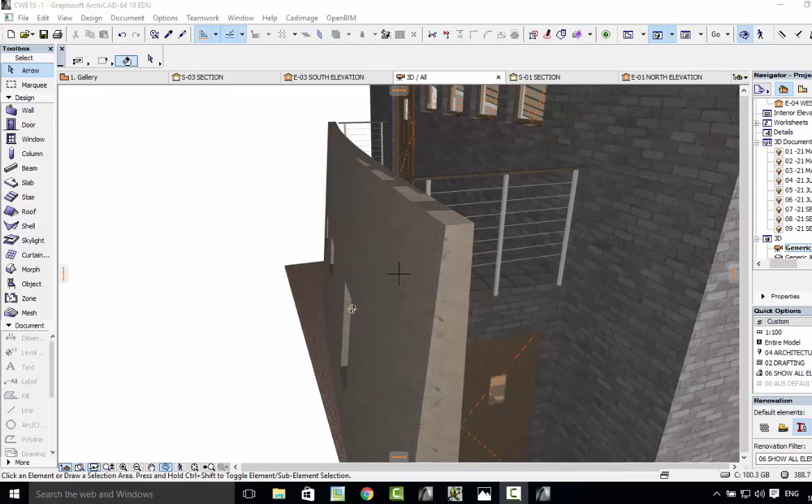Okay, we need to place some handrails at the gallery slab on the inside. I just want to have a look at this first. I've dropped that wall down again, so it's just below those handrails. I think it looks better like that.

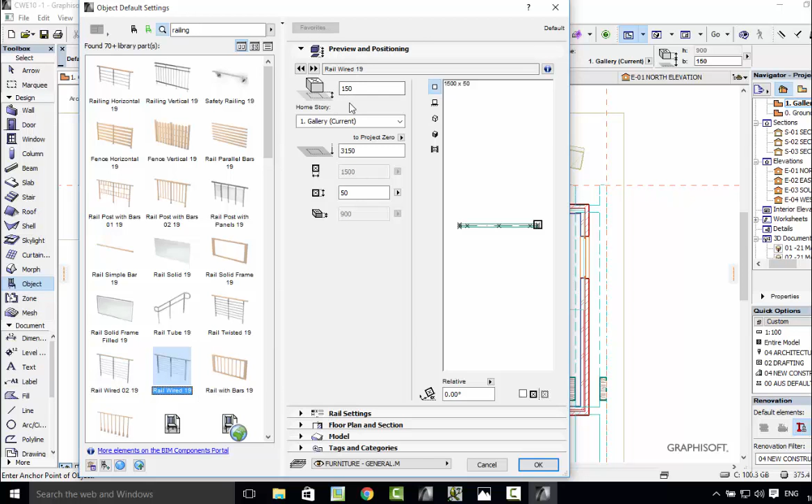Let's go into the 2D and into object. We're going to put handrails on the front of the slab here on the gallery level and around the staircase. Go in, type in railing, enter rail wired just to keep it uniform, and we have the settings which are pretty much the same. The only thing we'll need to do is go in and change how many posts we have. Number of posts here is 3.

Let's make the height 950, and 200, and we'll keep it 1500. 3 posts are 500 millimeters apart.

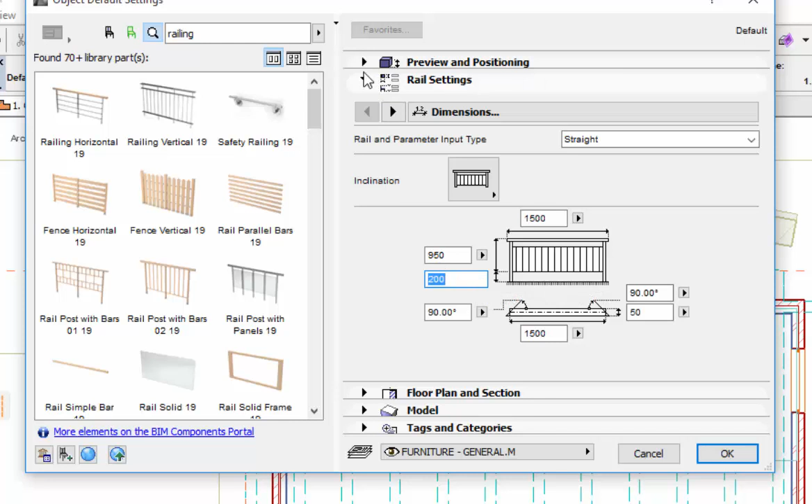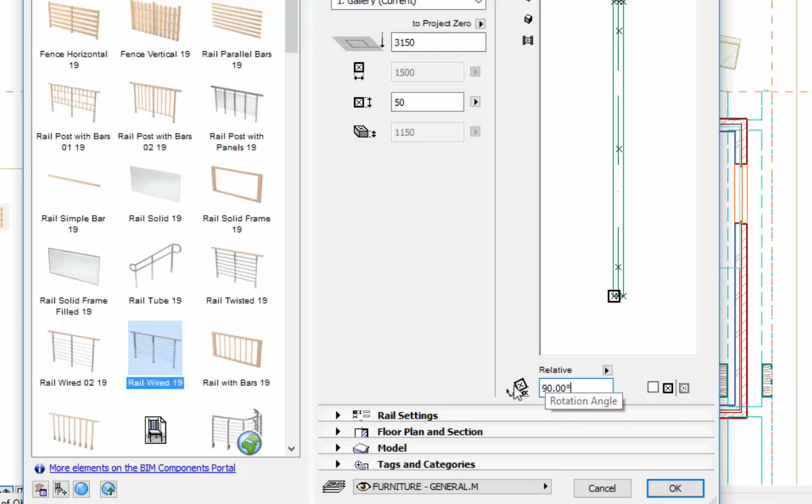That being done, let's have a look at the previous settings. We're on gallery level, 150. The rail we're going to put in around the stairs is going to be 90, so go 90 degrees. And we need to select the bottom left hand. That'll make sense in a minute. So we're going to have to continually come back into the settings tab and change our insertion point and our angle of our railing as we go.

Press OK. Let's zoom in. Now remember, we selected bottom left, so come into the bottom left corner, just click, and our railing's in.

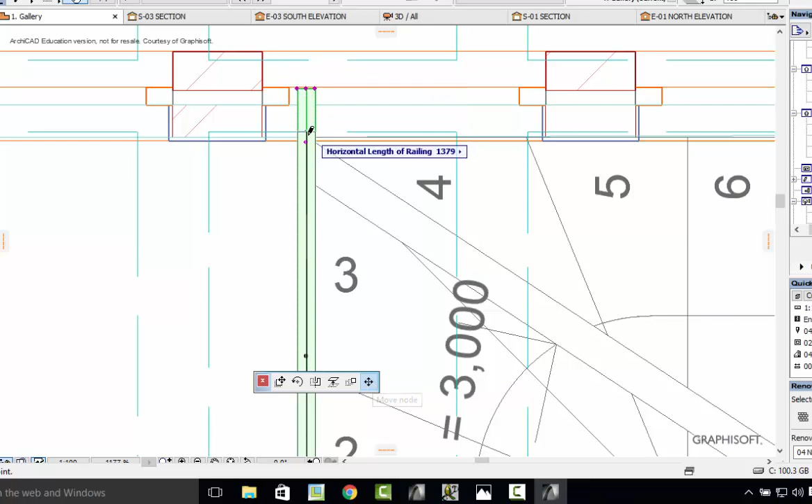Now we need to adjust that, so get out of the railing settings, center node, pet palette, stretch node, move node down to the wall. Right there, and there's our first hand railing in 3D. There's our hand railing in position.

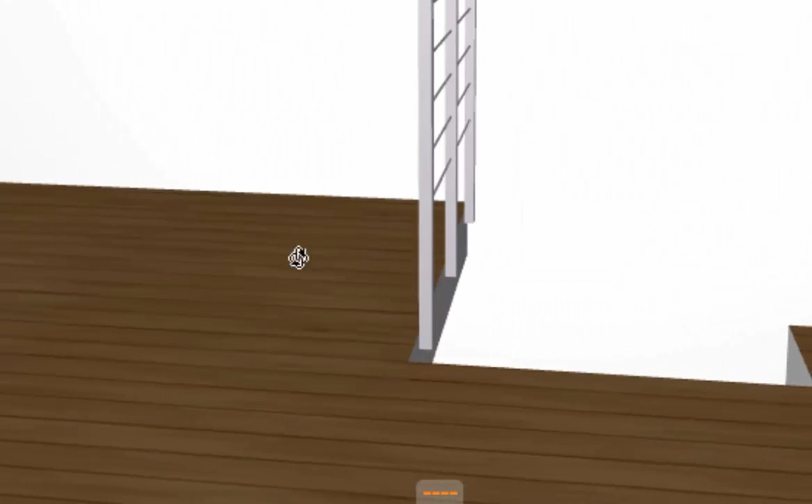Now notice that this bottom rung of the handrail looks a bit high to me. So have a look, I think it needs to go down. We've got 200 millimeters here. So let's go and drop the bottom of this handrail down.

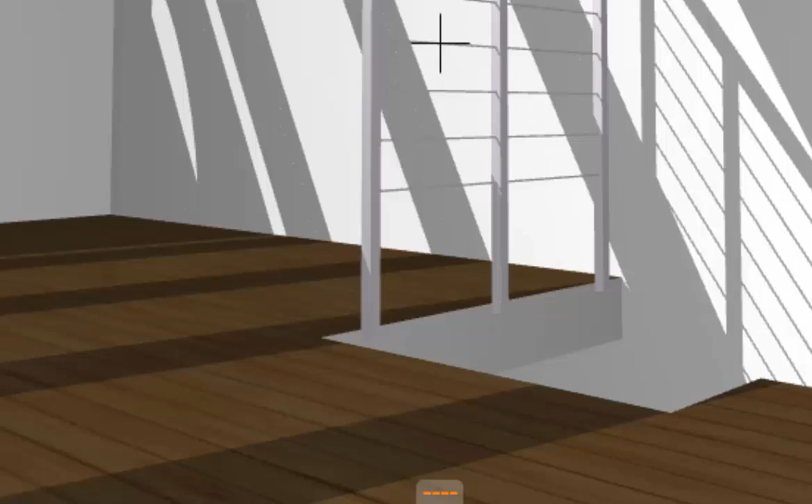So we need to select it. Go into settings, and from home story, let's try 50, enter. And let's drop down. That looks a lot better.

We could go a bit further. So, because the slab is 205, let's go down. Let's leave it maybe 30. Back into settings, let's go 30 there. That's the base of that rail. Press OK. That looks a lot better.

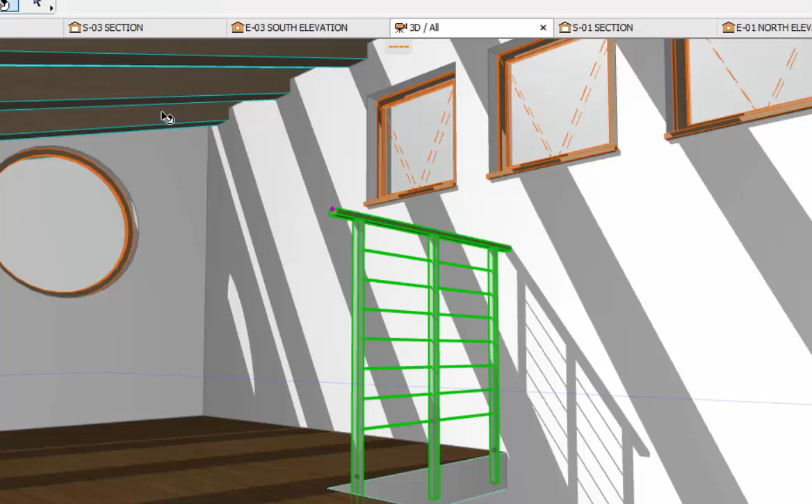So that's 30, and let's put our next one. Escape to get out of that function. Back into 2D, and we'll set up the next railing. Press object. Make sure you press escape so it's not selected. We don't want to change this one.

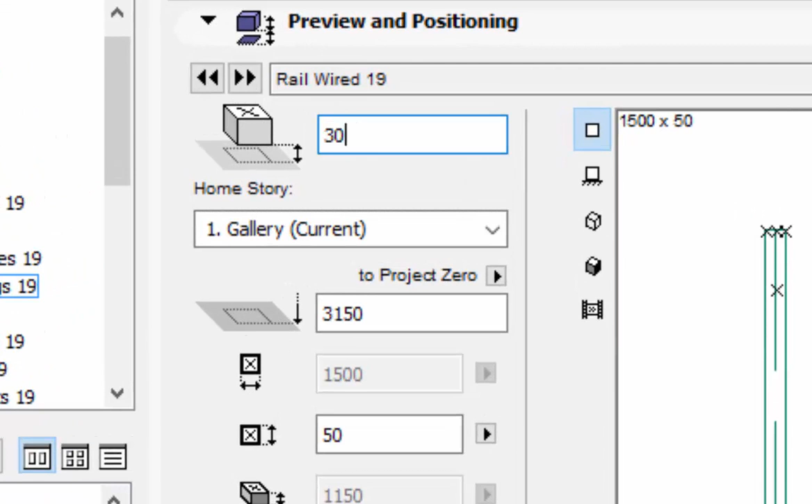We want to change our next one. So make sure we go 30 here. And our insertion point on this one, we need to change it around to 0. Enter. Change it around to 0, and our insertion point will be just here. Make sure it's bottom right. Press OK.

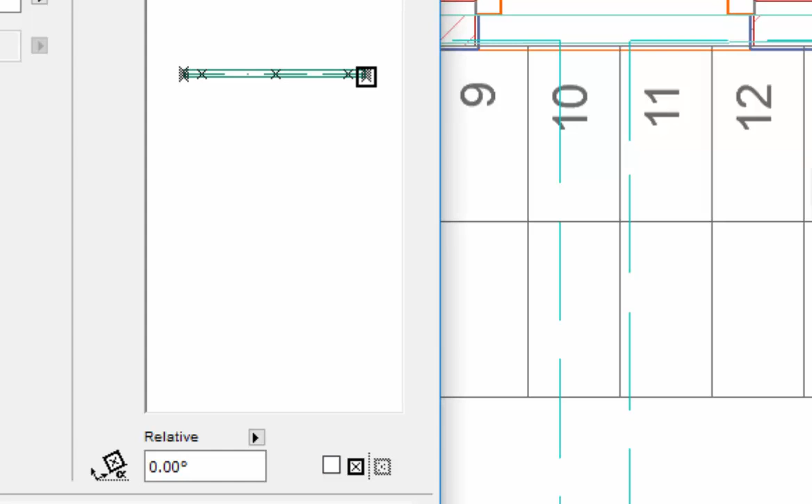Check rail settings are the same. Yep, okay. And bottom right, just there. Okay.

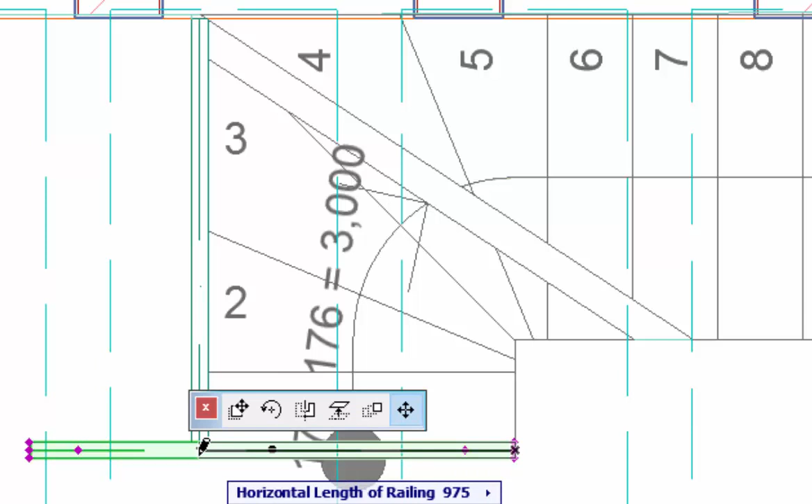What we'll need to do is stretch these. Make sure you've got the sensor node. Stretch them back till it comes. Let's just go halfway, and we'll see how that looks. Let's go in 3D.

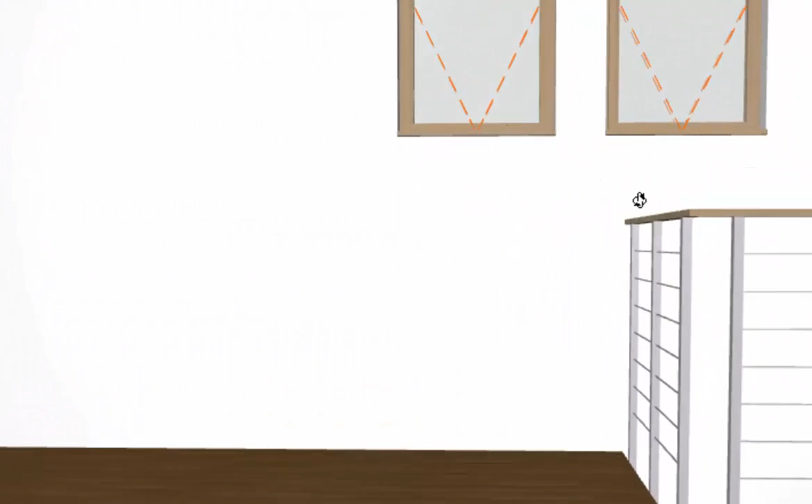That looks okay, we've got a miter joint. Now the only thing we'll need to do is adjust these posts here, and we can do that later. So let's put all the handrails in, and then we'll adjust them. So go back to 2D.

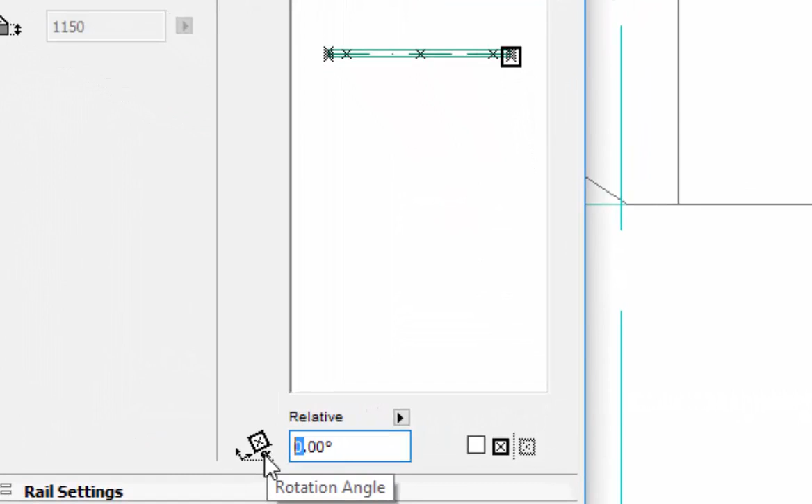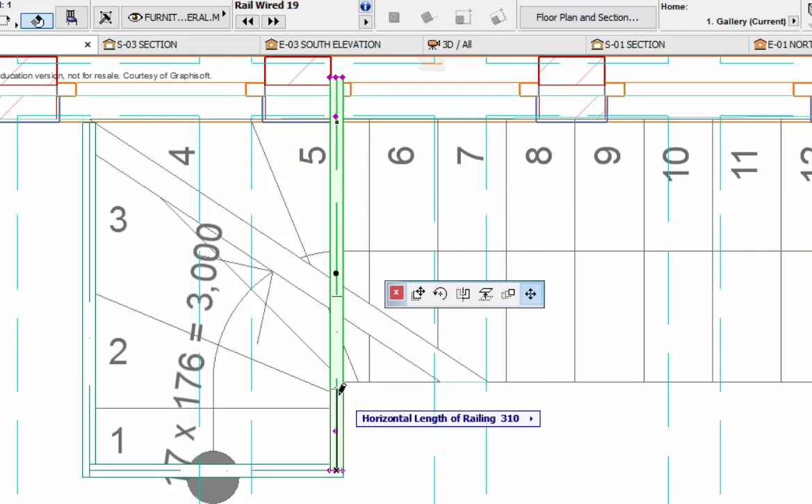Now we need to go 90 again for the small bit here. And we need bottom right. Okay, let's come in here, halfway along the rail, bottom right. Obviously we need to move this right in, just move it right back in until we get the other rail in. What we're going to do with this one is place it in and then stretch it along.

So hit escape to get out of that function. Object, and let's go 0, and let's select bottom right.

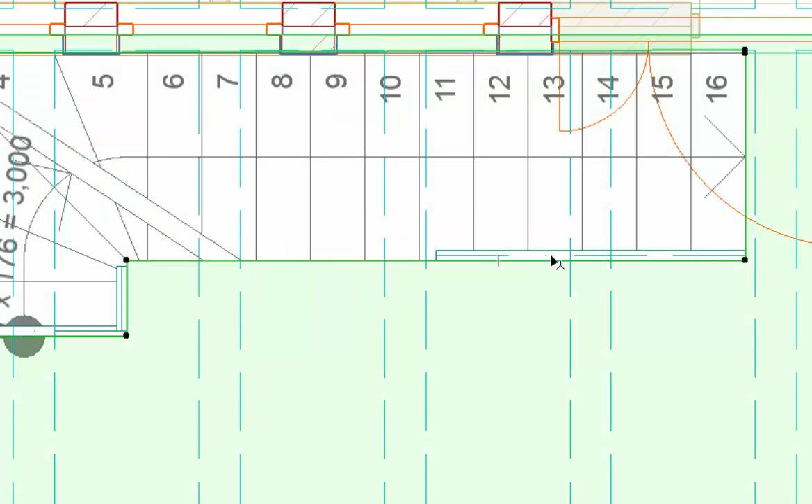Okay, place it in there. We need to stretch it along and then we can customize the posts. Remember, if you can't select it, hit the tab button. Come in, select the center node, pet palette, drag node, and come halfway there, and then bring this one halfway to there.

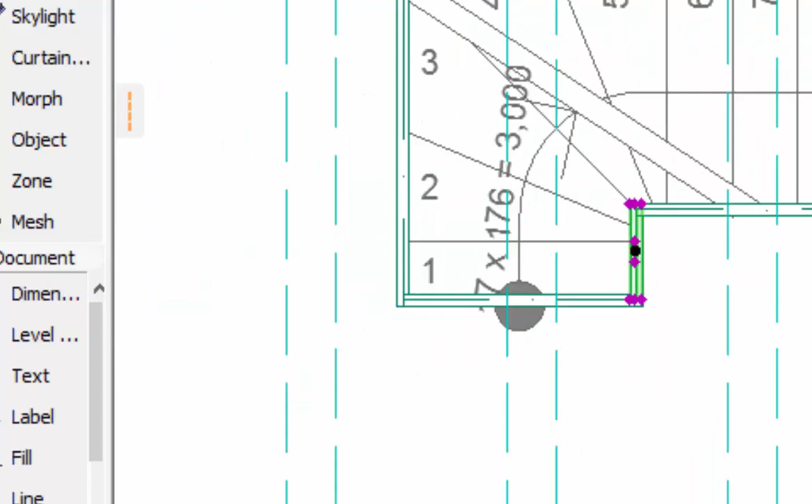Okay, that looks good. Now let's go to 3D. Okay, let's have a look. Obviously we need to adjust the posts, so how many posts we have in, so they look pretty much the same. So let's do that now.

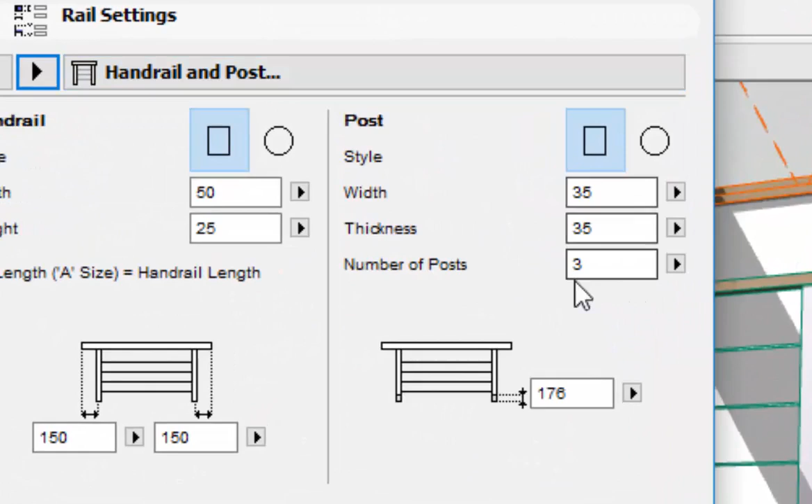Select this one, and we're going to get rid of the center post. Let's go into settings, and under rail settings, by handrail and post 3, let's go 2, enter. That one looks good. Now this one.

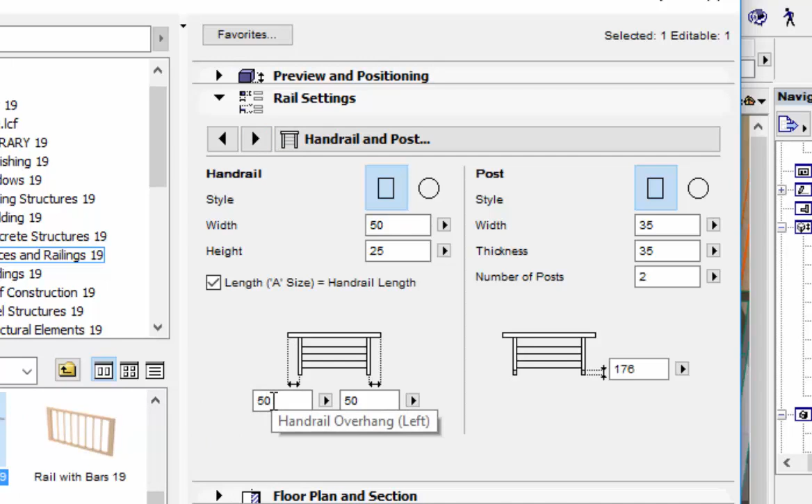Okay, I'm going to select this small rail here and do a bit of customization on it. Go into settings. Now we have here the distance that the post is away from the end of the timber rail, and in the others it's 150. I'm going to change these to 50 and 50 and press OK.

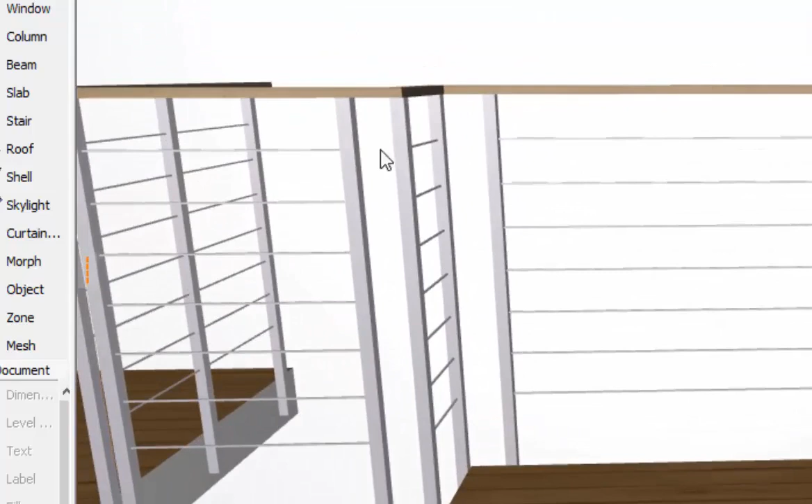Now when we look, I'll just escape. When we look at that, that looks more pleasing design wise than trying to make it 150. So what I think we might do is change all of the railings so they're all the same, and the railings will be 50 millimeters from the end. So let's do that. And this is all part of designing and customizing and being able to change things to the way that you like them.

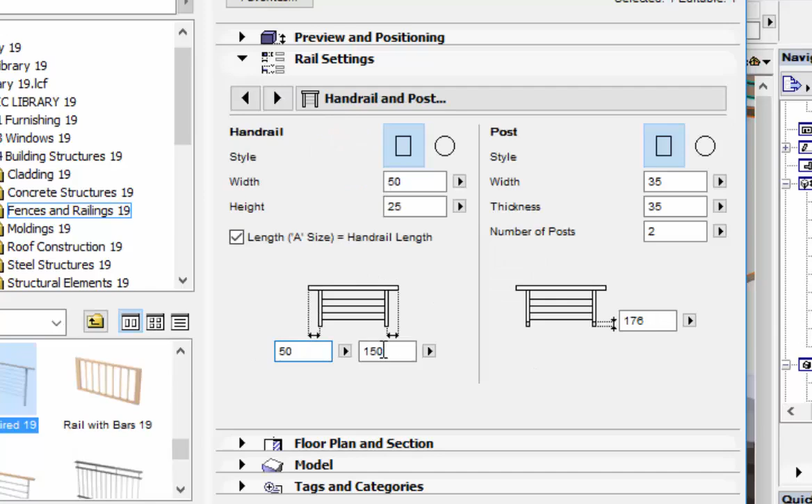So let's select this one, go into the settings, into handrail, and let's change that to 50. Change this one to 50. We'll just see what that looks like. Yeah, I think that looks much better.

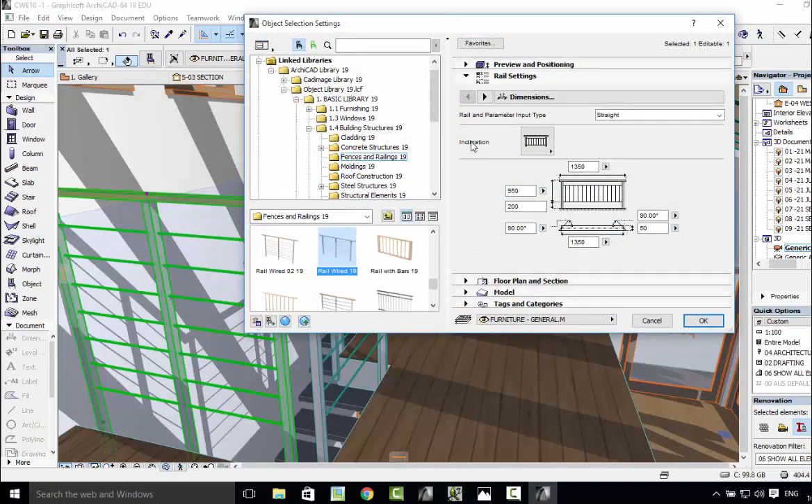Let's have a look on the outside here. Yeah, they're butting up to each other on the corner. Select that handrail, go into the settings, and again to handrail and go 50. Well, at that end, yeah, let's keep it 50. So it's uniform and 50 here.

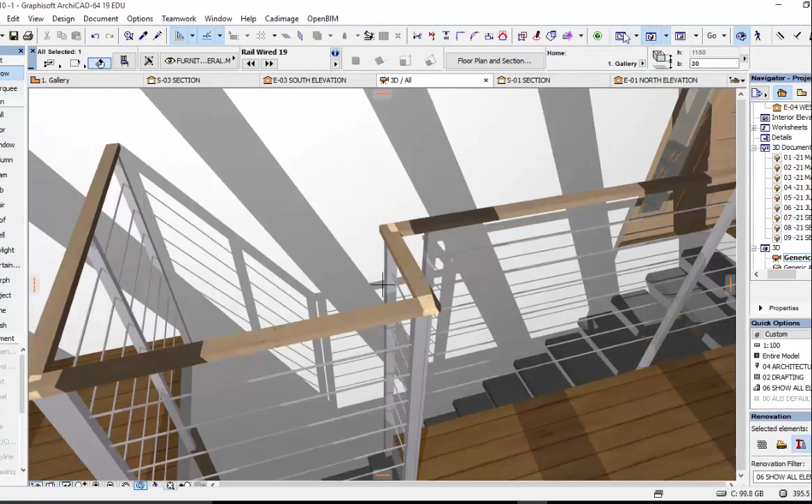Okay, and then moved out. Let's go into 2D and change this. Let's zoom in and let's go back to halfway there. And let's take this one back to halfway there. No, let's take this one right through to there.

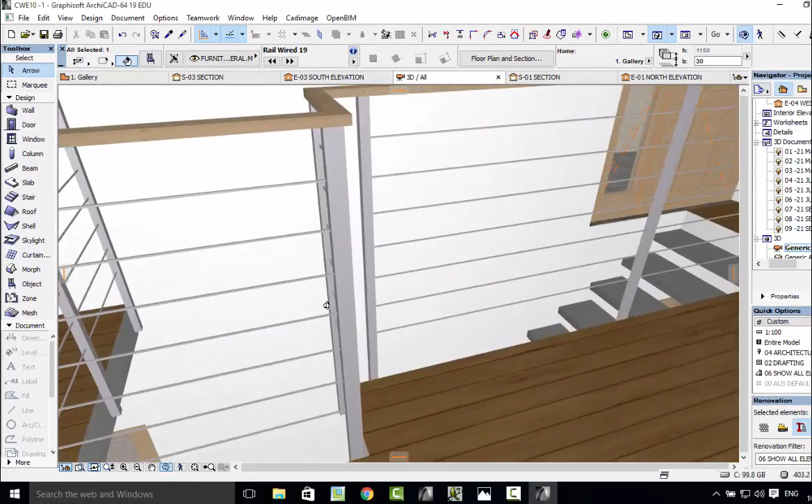Well, let's have a look. 3D looks better. It's matching the other side. Let's make sure they're matching. So see how this handrail, it goes to the center of the long one.

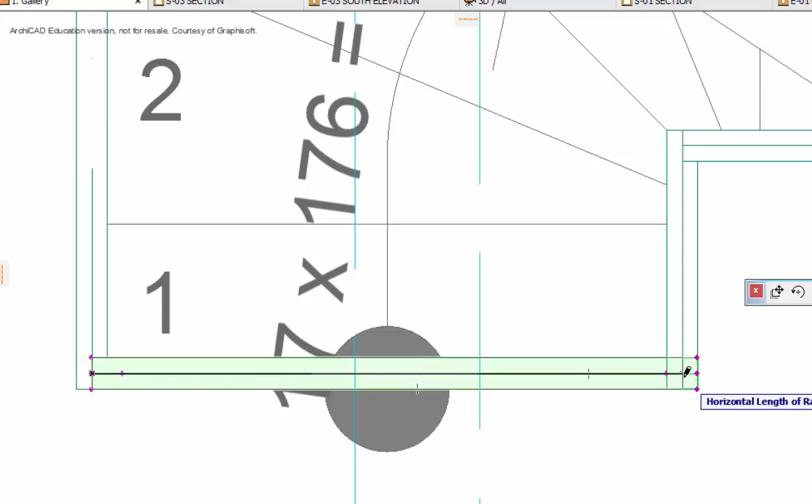Let's do the same. So let's bring this one right through to there. And when we select this handrail, let's bring that back halfway. And now it should match. Now those posts match, so let's do that all the way through. Back to 2D. That's correct.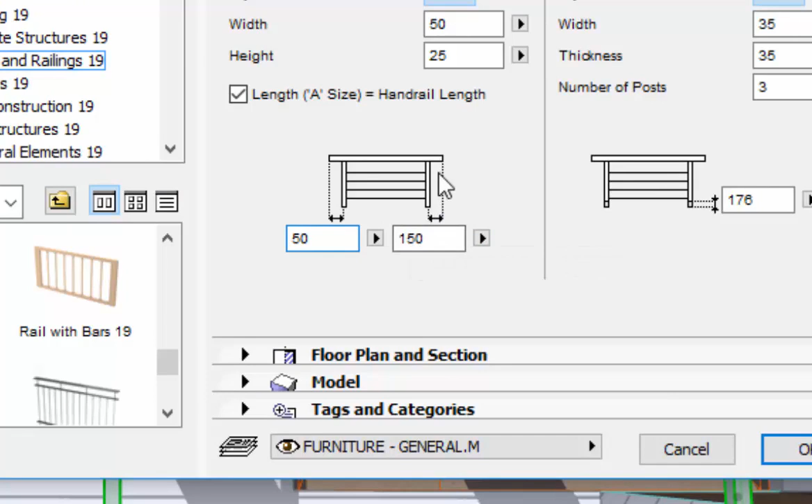And all we have to do is change now the number of posts in this railing here. Now on this last handrail, we'll leave this end at 50 and we'll leave the start end at 150 so someone can grab hold of the railing. There we are there. So that's 50, 150, and we're going to change the posts.

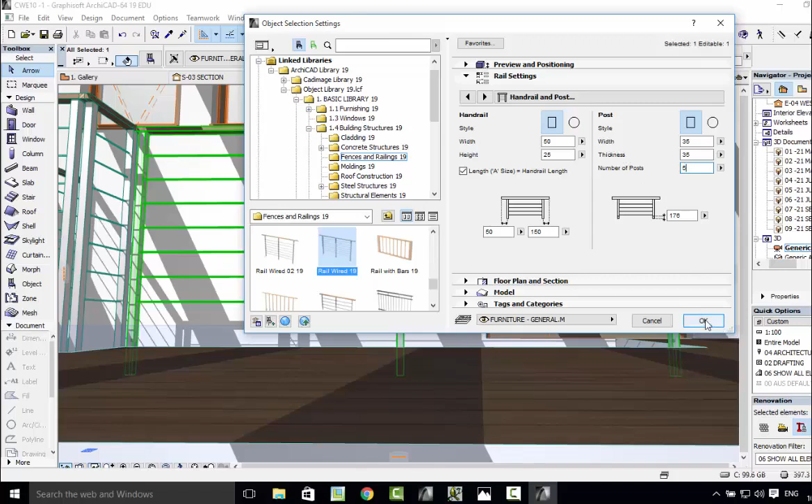I'd say we need about 1, 2, 3, 4, 5 posts. Let's go in and let's type in 5. Okay, and there's our 5 posts. Could get away with 4 posts. Let's have a look at 4. Yeah, I think that looks good.

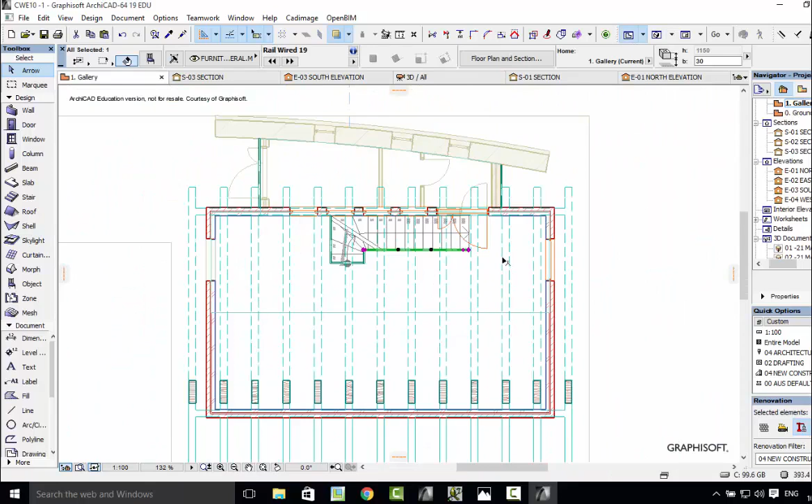Now all we need is the wireframe across the front. So let's go into 2D view. And we're going to do the same. Let's escape to get out of the function of selection there. Now let's go into object, rail wired 19 and OK.

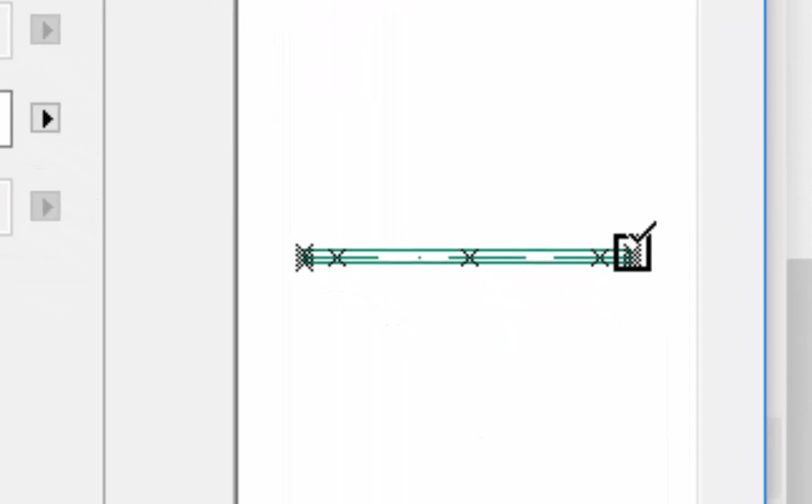And let's select the insertion point, and which will be top right. And remember that we made it 30. So that's staying at 30. That's good. And let's look at the rail settings. 950, 200, 1500, and we'll change them when we get in there. So we go OK.

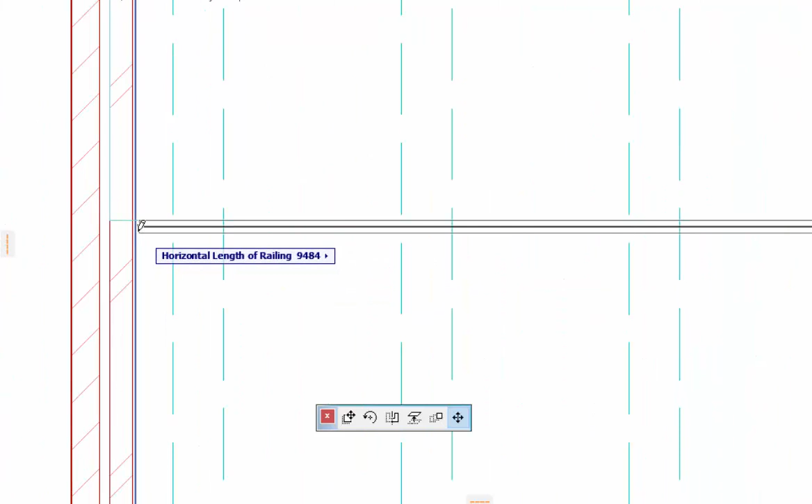Now let's select there. It hasn't gone right to the end, so we can just select the railing and drag it back to the wall. And now we're going to drag the railing here. And we're going to drag it right down here so it hits the wall there.

Let's have a look at that in 3D. Okay, let's place some posts in there. Select. Now we know that that's about 10 meters. Let's try 9. That looks good. Go to 2D and save.